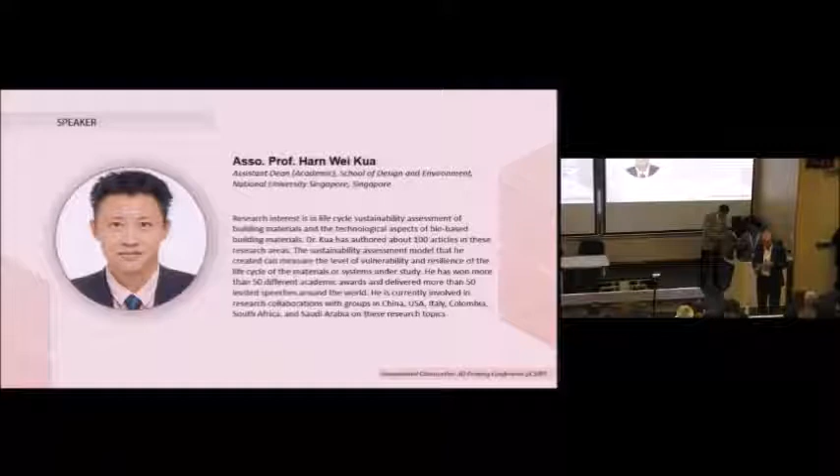Okay, the next speaker is Dr. Kua, whose research interests are in life cycle sustainability assessment of building materials and the technological aspects of bio-based building materials. Dr. Kua has authored about 100 articles in these research areas.

The sustainability assessment model that he created can measure the level of vulnerability and resilience of the life cycle of materials or systems under study. He has won more than 50 different academic awards and delivered more than 50 invited speeches around the world. He is currently involved in research collaboration with groups in China, USA, Italy, Colombia, South Africa, and Saudi Arabia.

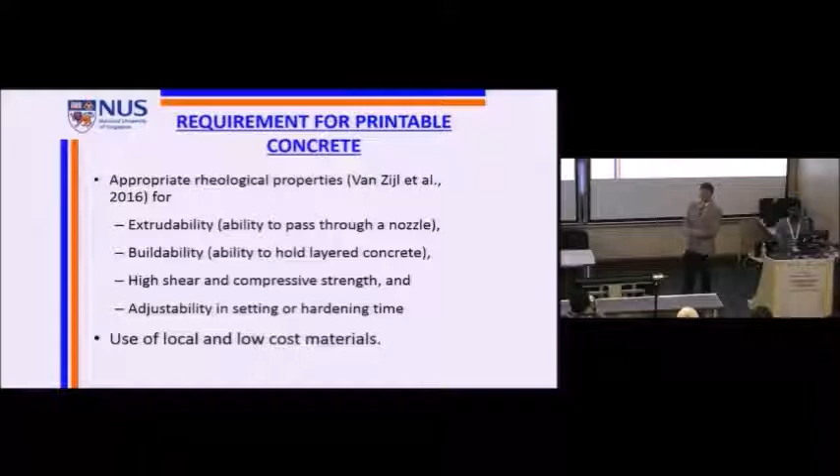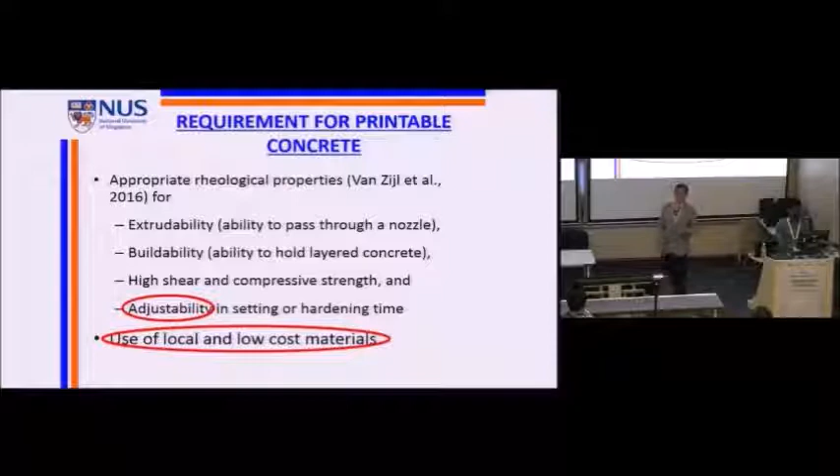This is something that has been alluded to many times today already, and that is the appropriate material and, more specifically, the rheological properties of materials for 3D printing. So I'm not going to go through this again. Basically, it is all about being extrudable, buildable, and of course, it must have high shear strength, compressive strength, and of course, to be adjustable. Adjustable in terms of the setting time and hardening time in the case of concrete.

And I think more importantly, which I'm happy to read about, which was actually mentioned in this particular article, is the use of local and low-cost material. And I find that if we are able to add one more line to that, it's even better. And I'm referring to the use of waste material. Waste material is everywhere, right?

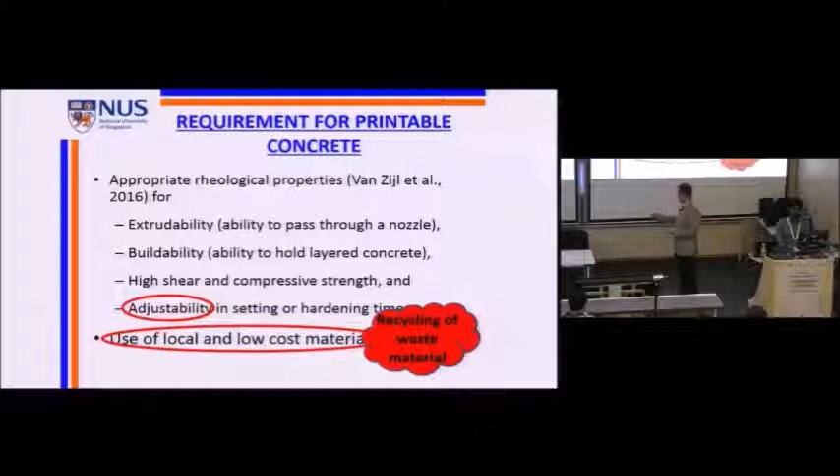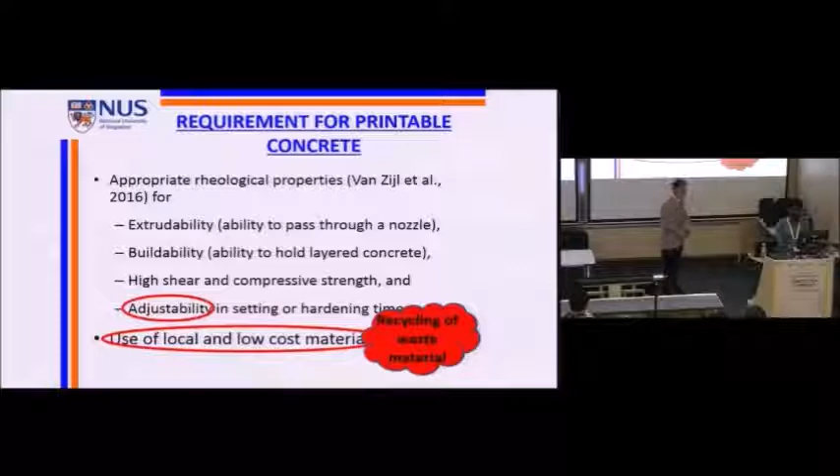In fact, having done different projects on waste, including food waste, which I'm going to talk about today. Just now, over lunch, I was a little bit concerned, and I was always looking around, especially into the dustbin, to try to find out whether we have been throwing away too much of the food that we can actually eat.

So let's look at some statistics. I mean, I'm not terribly proud about all these numbers of the amount of food waste and wood waste that we as a country generate every year. Not to mention that our recycling rate for food waste is not very high. It's about 13%. So can we do something about it?

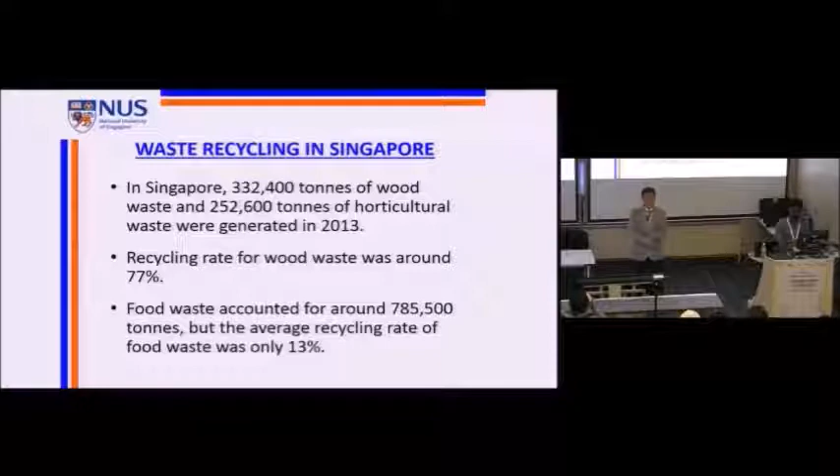Of course, I'm not trying to say that the technology that I'm going to share with you is going to improve that number by increasing the recycling rate many folds, but I see that as a potential in the future. So this is what typically we see, and I'm not going to go through the details here about how much we are producing every year and how much of what we produce is recycled.

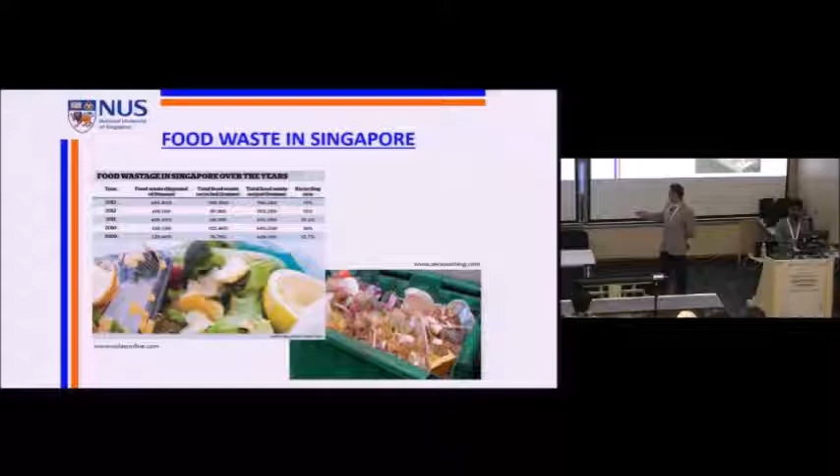But let's talk about whether we can come up with a technology that in the first place can help us to recycle agriculture. Yes, we do have an agricultural industry in Singapore. Many of you not from Singapore may not be aware of that. So can we do something to recycle the agricultural waste and also food waste for construction? At the same time, do a bit more to improve the tunability, the adjustability of material properties for 3D printing.

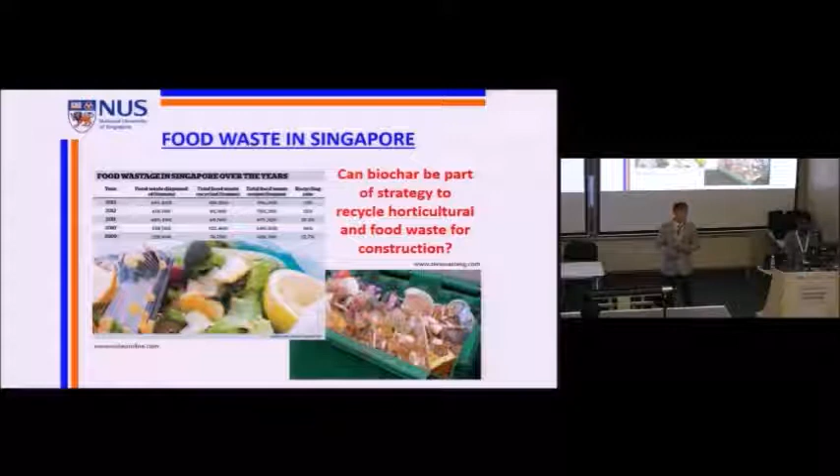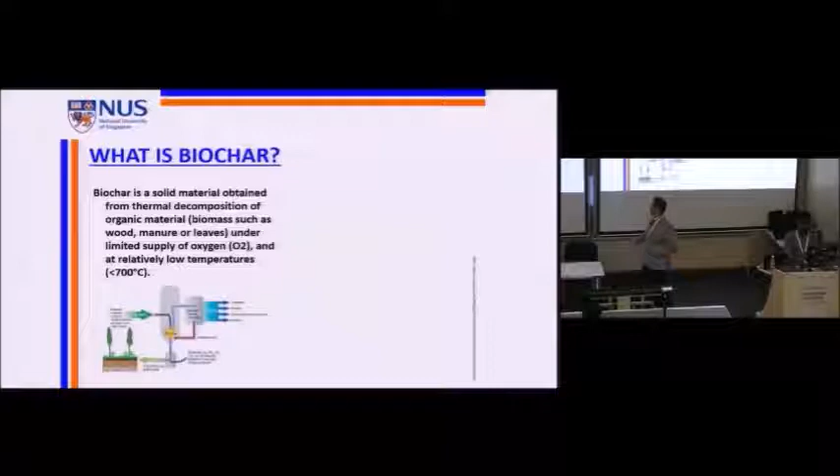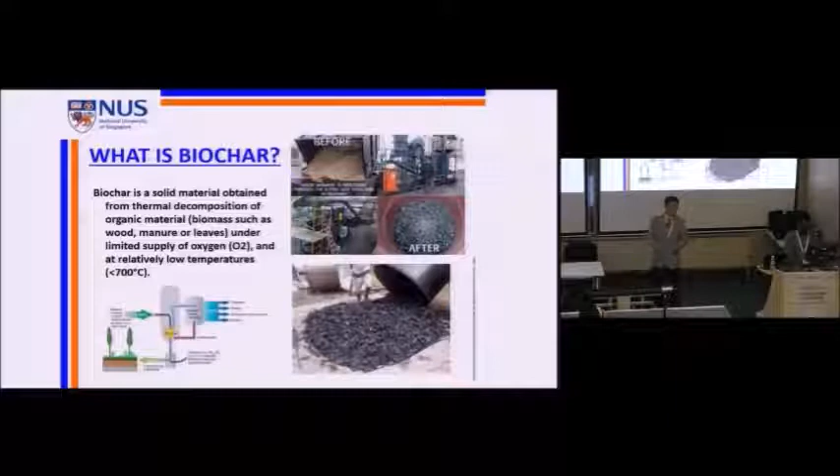So here we go. What is biochar? Biochar basically is a solid byproduct of thermal decomposition under very special conditions. And some of you may actually identify this term called pyrolysis. So these are just some pictures of what biochar looks like. Basically, it's almost like charcoal. The only difference is the conditions under which it is produced.

There have been a lot of studies already about the pros and cons of biochar and the fact that it is widely considered as a carbon negative material. Of course, that is provided that we are able to evaluate the amount of carbon it can sequester as well as take in throughout its whole life cycle. And these are just some of the major

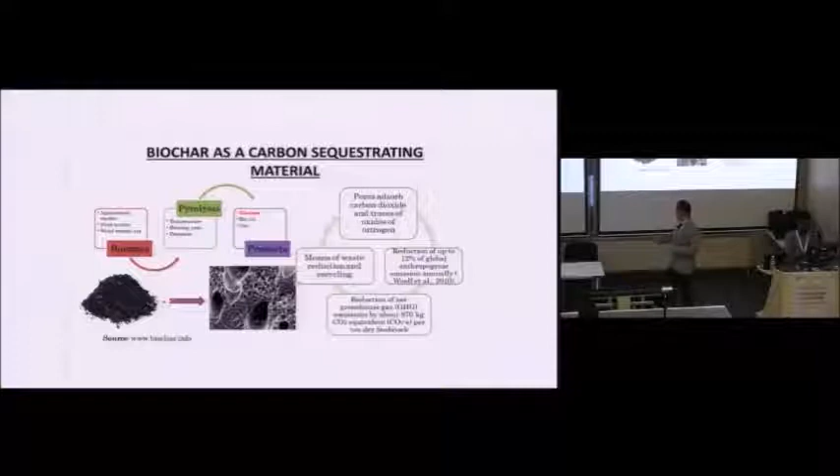benefits identified for biochar. Well, a little bit of history about biochar. It is more of a material that is being adopted widely for agriculture, for soil remediation, for example, as well as the removal of pollutants in water. And now we are pushing for using it as a way to remove pollutants in the air. But of course, before that, we have done a lot more work, excuse me, by using that as an additive in concrete.

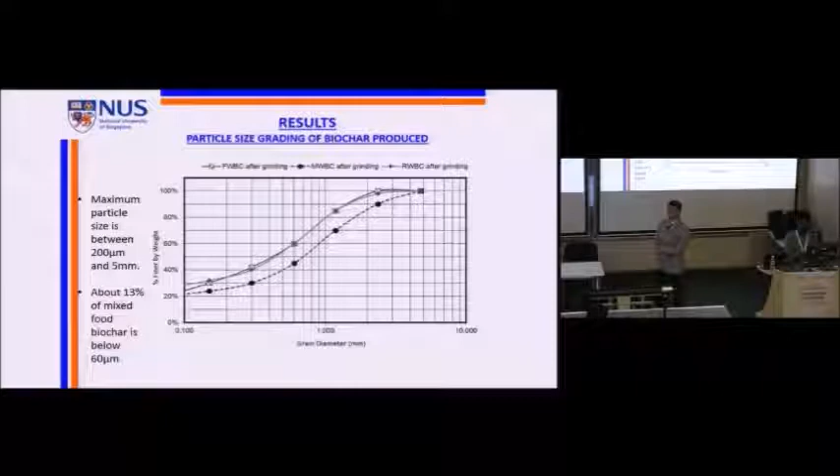So what's the big deal about biochar? With only a few slides, this is going to be quite a short presentation, I'm going to introduce to you some of the desirable properties of biochar, which actually hold relevance to 3D printing. But before that, let's take a look at the size distribution of the grain. And of course, this is linked to the morphology.

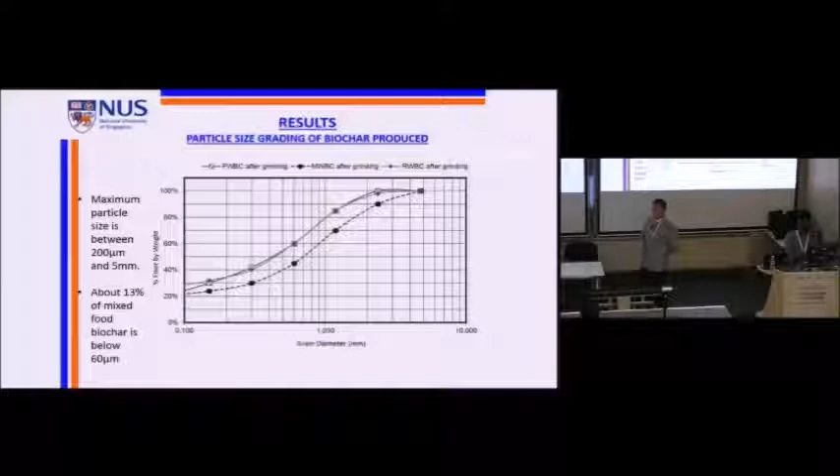So moving on, these are some of the key results that we have found. And over here, you see the comparison of the compressive strength of mortar containing different types of biochar. And by that, I mean wood waste, food waste, and rice waste biochar.

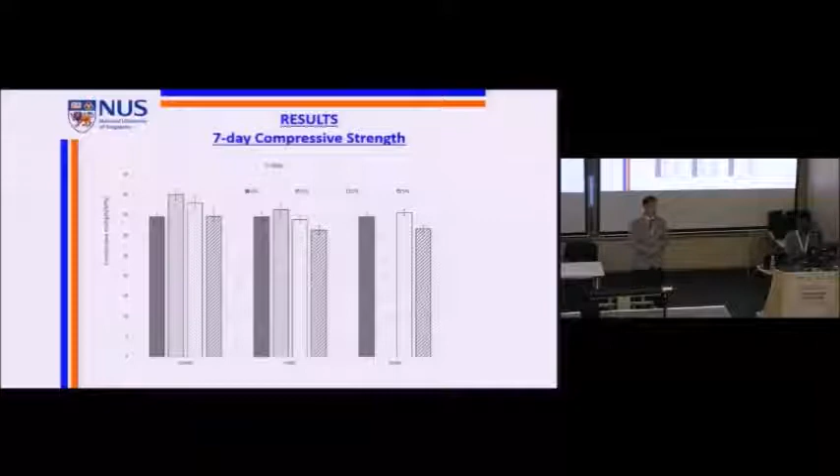And in case you're wondering, yes, we do throw away some portion of the rice that we eat today. So I hope that after my presentation today, even if you cannot remember anything that I said, please remember not to throw away your food.

So, what's the message here? The message here is that if you have biochar added into the mortar, you find that the early strength actually goes up. But of course, the extent of increase is where the tunability and adjustability lies. So if we can, and I'm confident about that, adjust the amount of biochar that we use, as well as make use of different kinds of biochar, we might be able to bring it down to that delicate degree

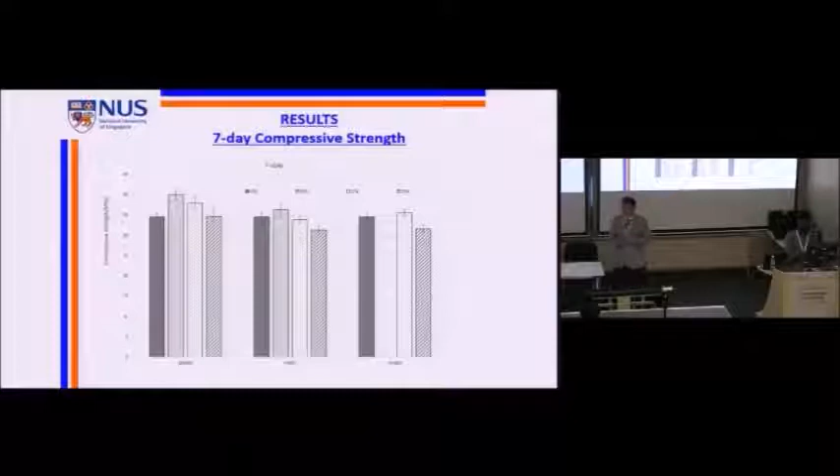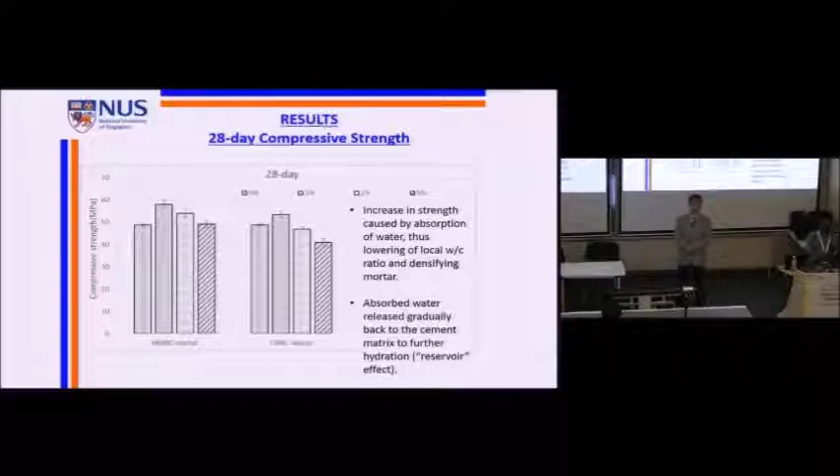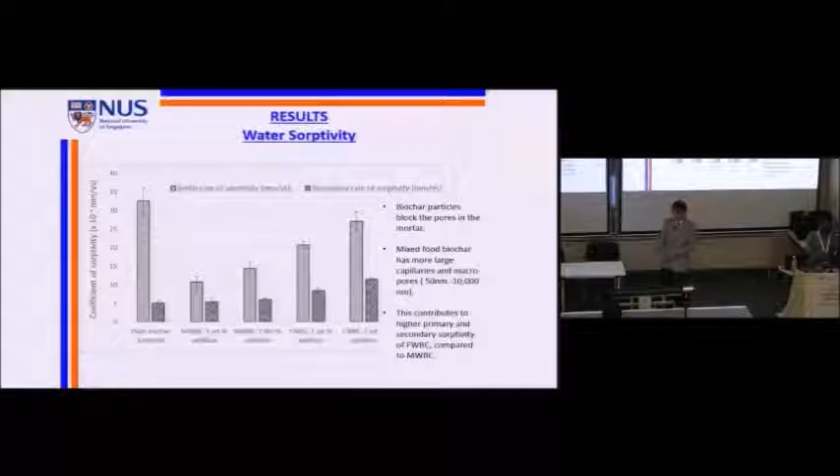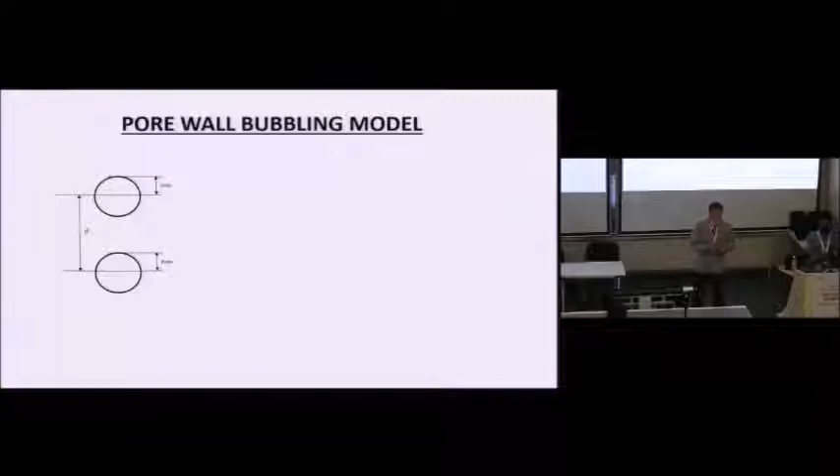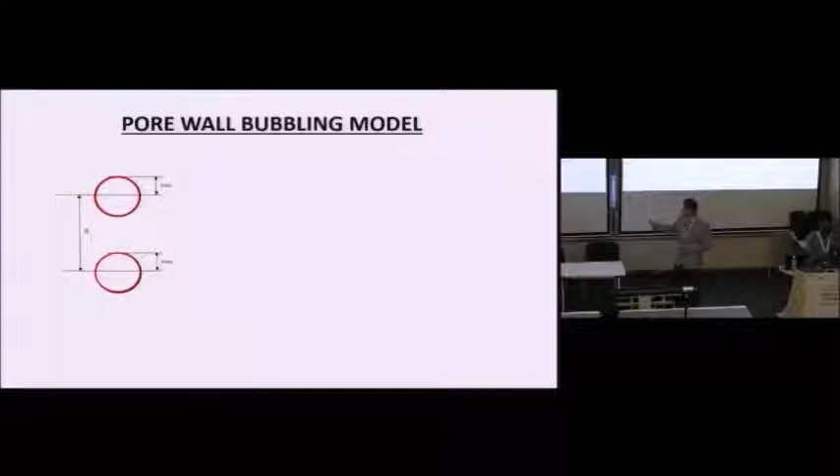Of course, conducting all these experiments and making sense out of these results are definitely important. But what I think is equally as important is for us to have a very accurate understanding of the theory behind all these phenomena. So we have just created a model that allows us to actually imagine what happens when pores are formed in biochar in the process of pyrolysis. So you can imagine that we have two pores in the biomass, and in the process of the pyrolysis, these pores expand, combine, and become what we call a pore cluster.

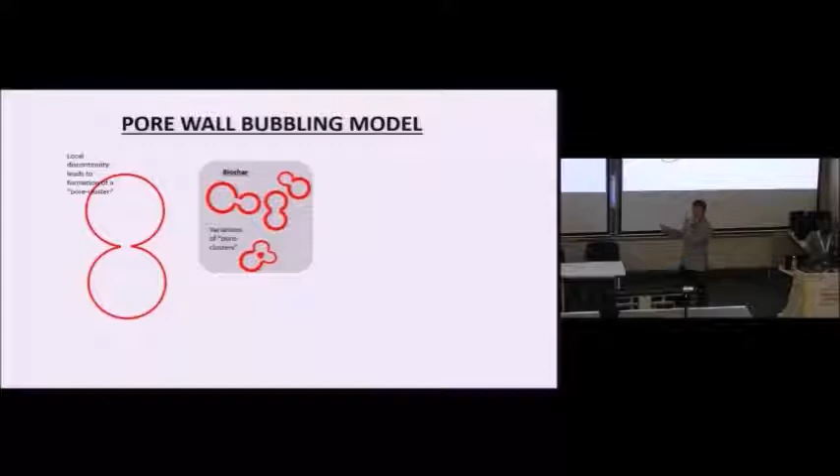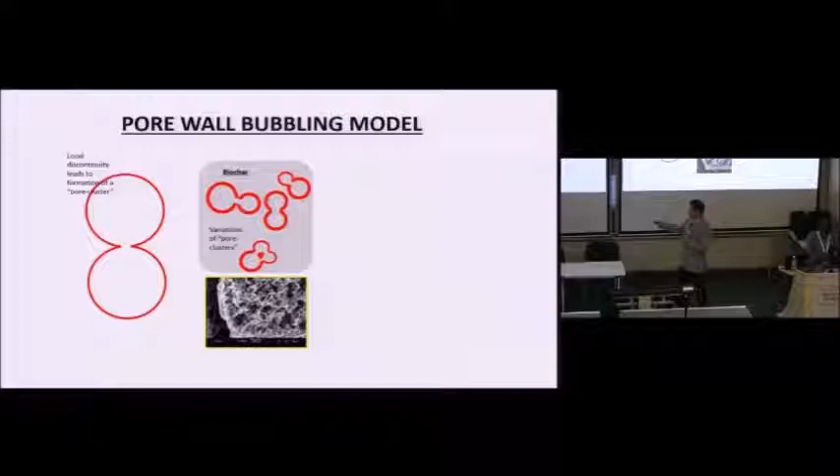And then, if we are to use this model and imagine how these are actually present in the actual mortar containing this very porous material called biochar, which is basically quite similar to this, and you consider furthermore a local region like this and how that particular region can actually bubble off. Now that's my own term, we call it the bubble off, and that's why it is known as the pore wall bubbling model, which is more realistic because it is about non-uniform and localized expansion of the pore wall.

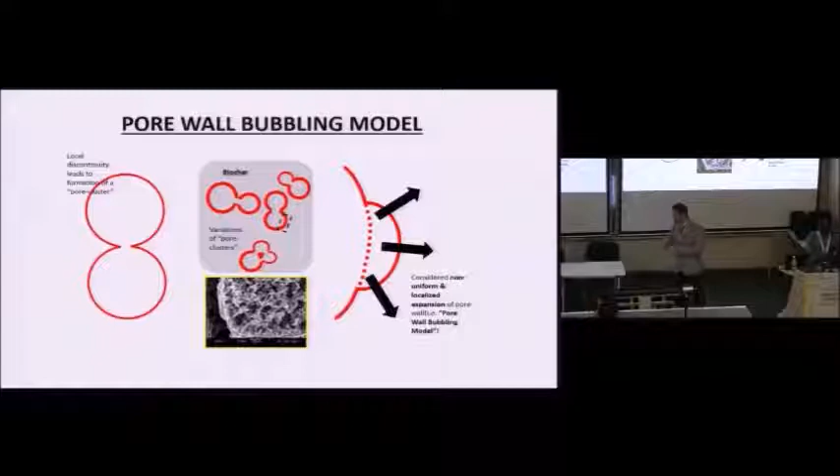And of course, using the data, we managed to find certain things which can actually be verified. We are still in the process of doing so, and that includes, for example, the number of pore clusters in a sample of about 10 grams of biochar. So this is the number that we have predicted. We are in the process of verifying that. We even uncover certain characteristics not discussed anywhere in the literature, which includes what we call the R critical, and the minimum size of the pores that can be described using this model.

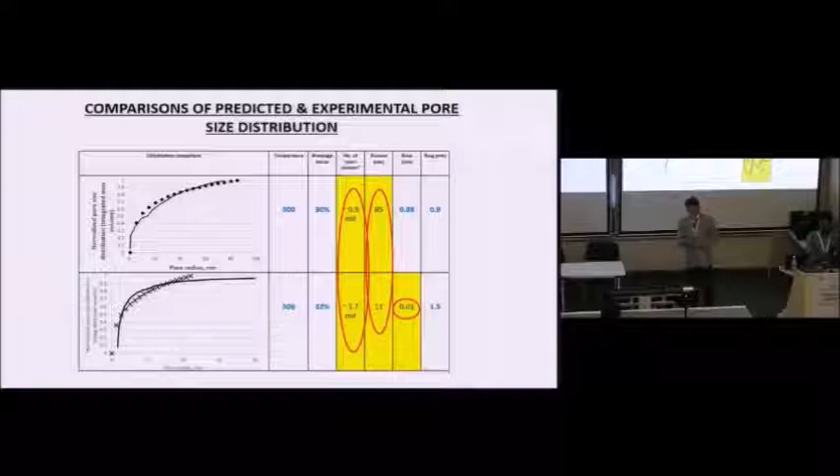In conclusion, we have in a way shown that biochar as a building material seems to be a pretty effective way of recycling the kind of waste that we have. Ultimately, nothing can be as local a material as the kind of waste we produced, and mortar containing biochar has a higher early strength and low water sorptivity. And I think that can open new doors or possibility for us to tune mortar containing biochar and see how it may work better for 3D printing.

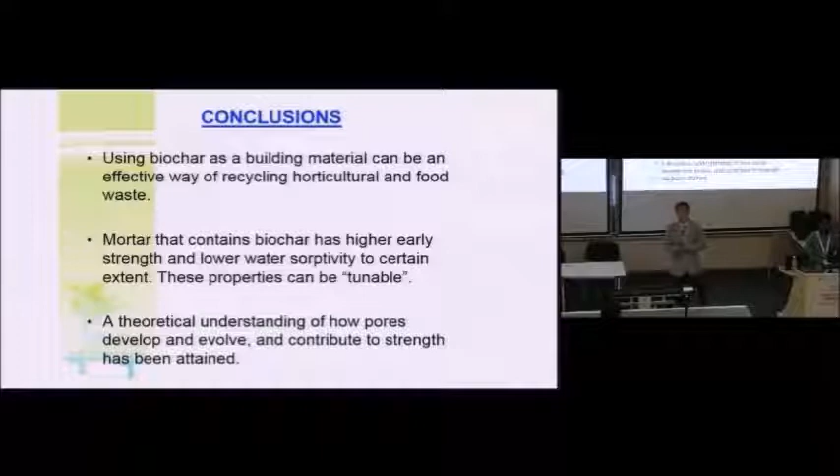And last but not the least, a theoretical understanding of how the pores are developed, form, and evolve is very important because it will then allow us to choose the right kind of production environment as well as feedstock in order to produce the kind of biochar that we can further tune in order to improve the quality of 3D printing. So this is where we published our result not too long ago.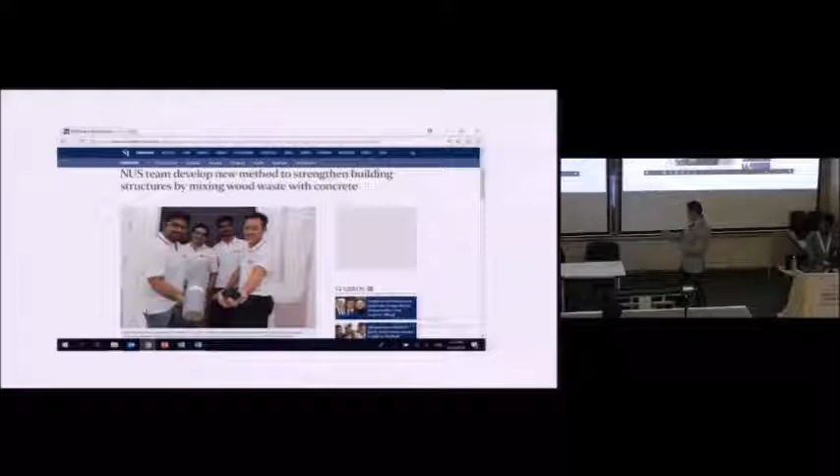Suradip, maybe you can identify yourself. He has done a lot of good work in this area. He's in our team. Good to have you. And of course, the rest of my guys here, they are now clapping. So this is us. Mani is here. Chakri. So basically, we were the center of the world's attention for maybe 5 minutes. After taking the photo, that's it. All right, so this is where we were in the lab, showing off our invention.

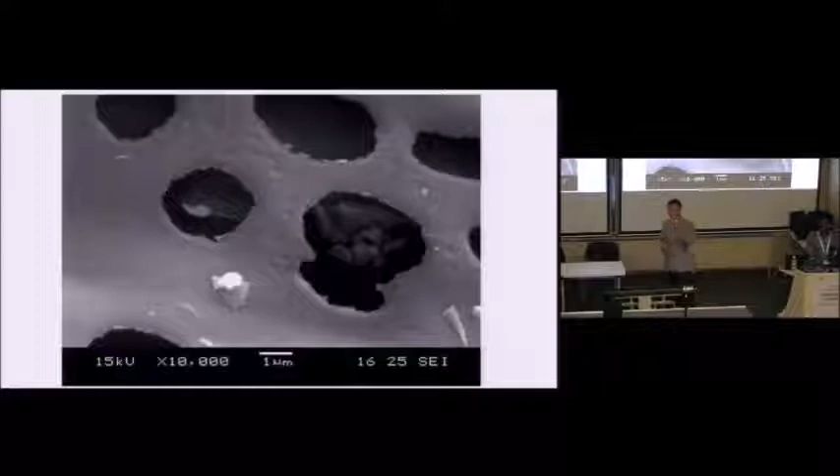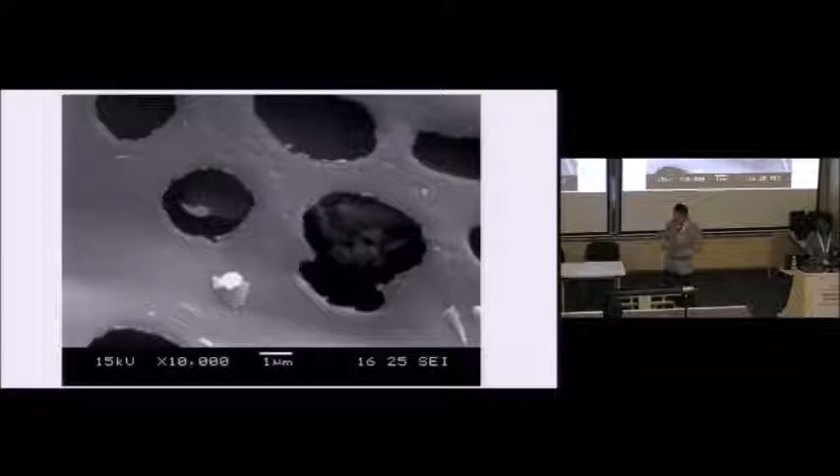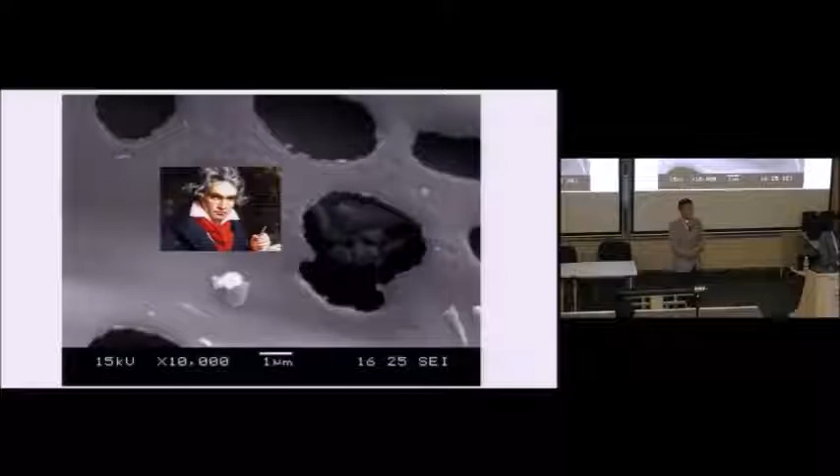And of course, let's play a little game here. What do you think that is? Oh, we have Swiss cheese coming out. You know, that's a good thing about doing material research. When you get down into the minute, when things become boring, you try to imagine certain things to spice your life up. Any other suggestion? Ice. Okay, this is basically a pore in biochar, right? If you look at this deeper, I don't know what you see, but I see this guy. Beethoven. So that's the thrill of doing biochar material research. It thrills you, maybe because of your imagination. But anyway, what's that? Yeah, that's right. Maybe it's just some illusion, like what I said.